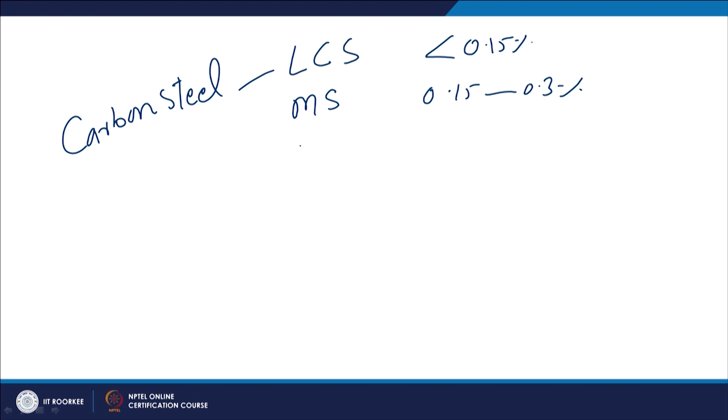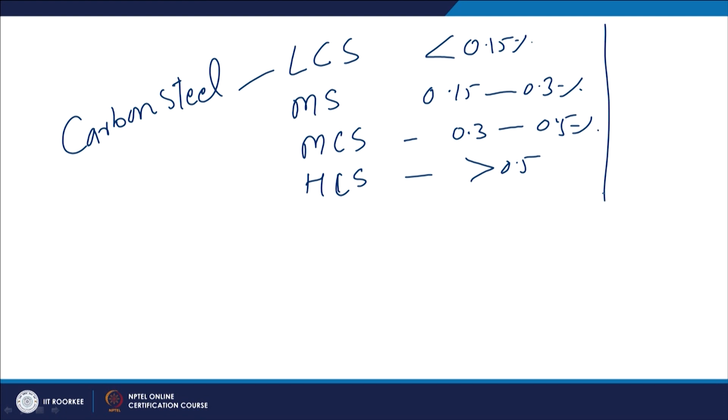We are talking about the weldability of steels, and there are four broad categories: low carbon steel, where carbon content is less than 0.15%; mild steel, where carbon content is about 0.15 to 0.3%; medium carbon steel, in the range of 0.3 to 0.5%; and high carbon steel, greater than 0.5%. According to the carbon content, as it increases, the weldability of the steel in general decreases, but still we have to weld the different types of steel. So which kind of weldability issues are offered by the various types of steels is what we will be talking about under the weldability of carbon steel.

In this presentation I will be talking about the weldability of low carbon steel first, and then I will talk about the weldability of mild steel. As I have said, low carbon steels have carbon content normally less than 0.15% and the manganese content is about 1%.

Since both carbon and manganese concentrations are low, the carbon equivalent associated with such steels is also very low. Due to the low carbon equivalent, this type of steel offers low hardenability, and the reduced hardenability associated with this leads to very good weldability.

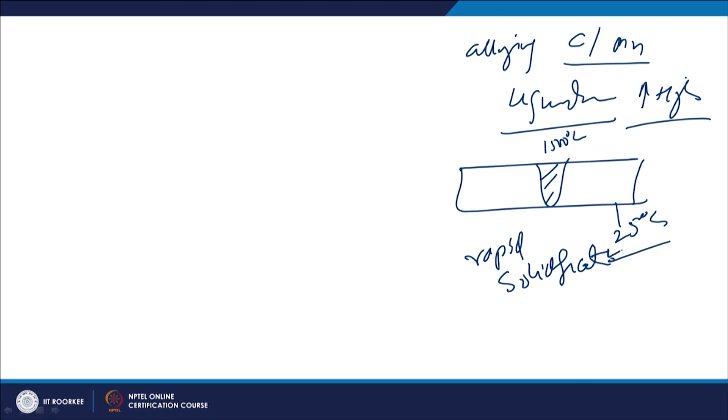Another issue related with rapid solidification is the development of pores or porosity in the weld metal, but not in all types of low carbon steel is this problem observed.

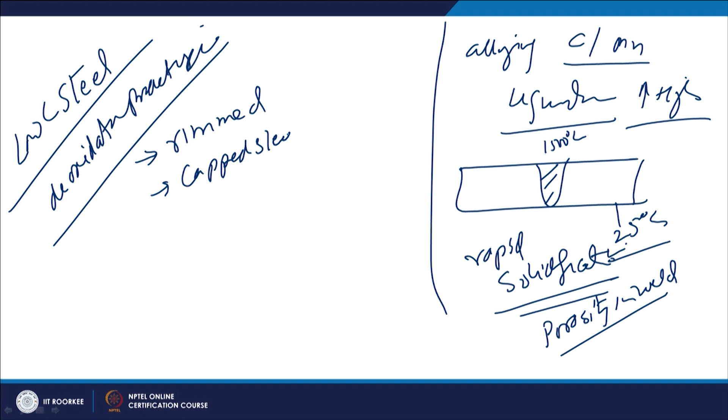Low carbon steels, based on the deoxidation practice used at the manufacturing stage, are grouped as rimmed steel, capped steel, semi-killed steel, and killed steel. This deoxidation is carried out at the manufacturing stage using suitable deoxidizers like aluminum, silicon, manganese. When this is not done at all, the low carbon steel will have high oxygen concentration in the steel itself, while in case of semi-killed or killed steels, the oxygen concentration is reduced through deoxidation using aluminum, silicon, or manganese kind of elements.

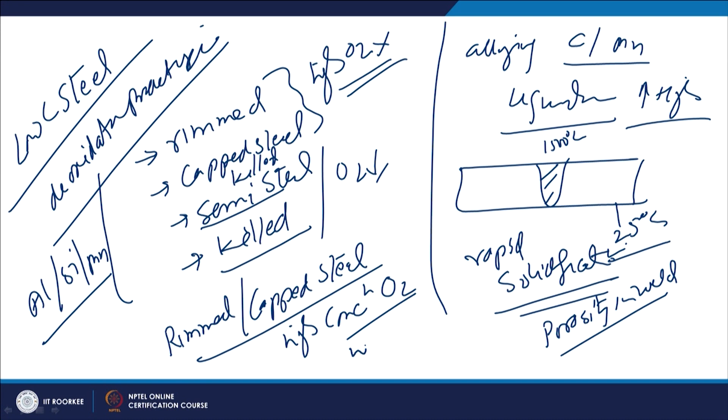So when rimmed or capped steel, which has a high concentration of oxygen, is subjected to fusion welding, then we come across the problem of porosity.

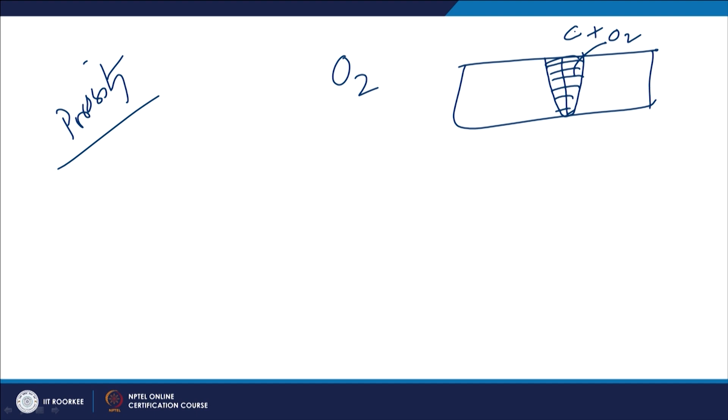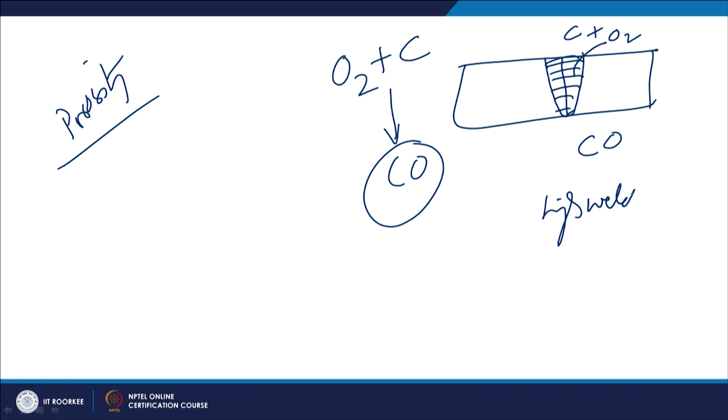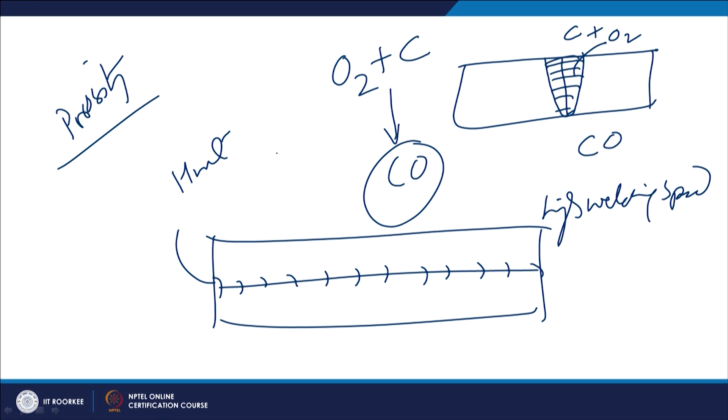So, the net heat input is reduced, and a reduction in H-net, that is net heat input, due to increase of welding speed - the cooling rate is increased because heat input, or cooling rate, is found inversely proportional to the H-net. So, if the heat input is reduced, then this in turn increases the cooling rate. So, there are two aspects: the faster extraction of heat from the weld metal coupled with the higher cooling rate due to the higher welding speed.

If these two combinations are present during the welding of low carbon steels which are rimmed or capped type, then carbon monoxide, due to the high cooling rate conditions - the weld metal experiencing the higher solidification rate, reduced solidification time - this situation leads to the entrapment of the carbon monoxide gas in the weld metal itself, because it does not get enough time for escaping, and this leads to the entrapment of the CO in the weld metal itself. That is how it leads to the development of pores.

So, the high cooling rate being caused by the high welding speed during the welding, coupled with the rimmed or capped steel having the higher concentration, leads to the formation of CO, and eventually due to the high cooling rate, entrapment of the CO leads to the development of the pores.

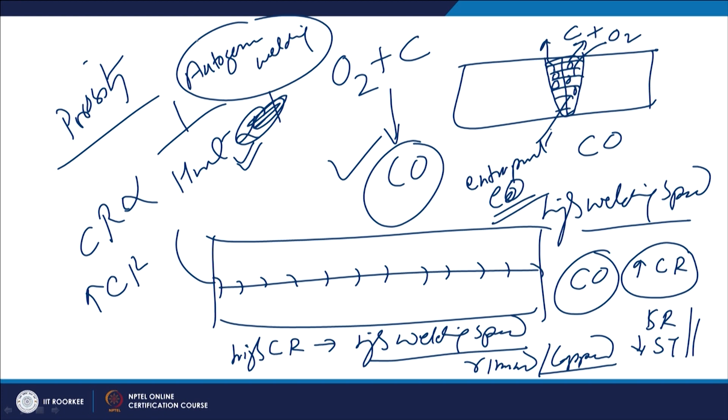So, in general, this is the commonly encountered problem in case of the autogenous welding of low carbon steels, or the rimmed or capped type of low carbon steels, because in autogenous welding we simply supply the heat from the external source for facilitating the fusion of the faying surfaces, so that whatever oxygen is present in the base metal or in the molten metal reacts with the carbon to form carbon monoxide.

So the deoxidation, the type of deoxidation practice used in manufacturing of the low carbon steel, affects the soundness of the weld metal through the development of pores, especially in case of autogenous welding, and this type of welding is performed using non-consumable welding processes like gas tungsten arc welding, plasma arc welding or laser welding - where the electrode is not consumed during the process as an inherent part of the process, but if it is required to feed the filler metal, then it will be fed from outside in the form of a filler rod.

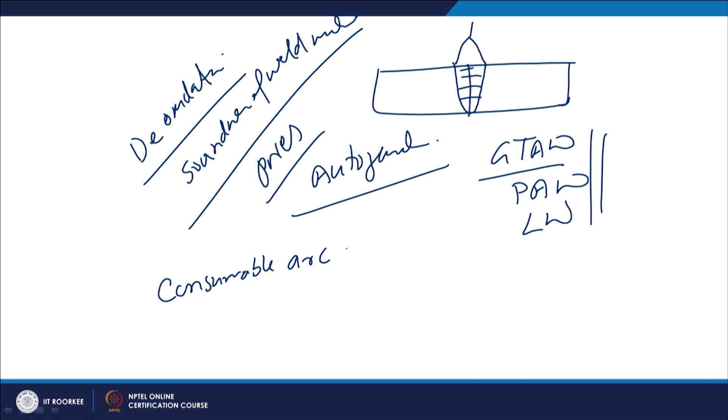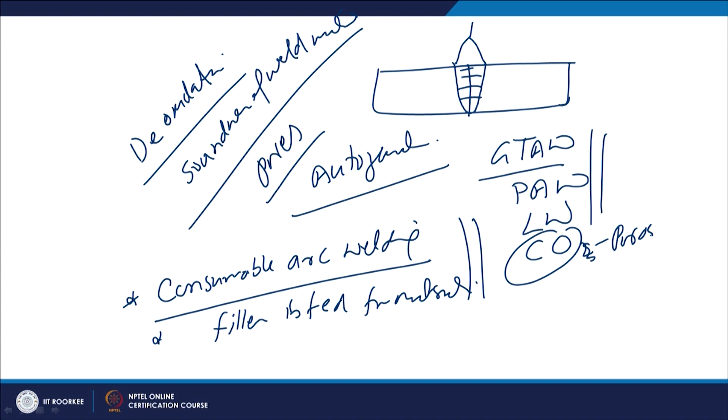So, when we use consumable welding processes - consumable arc welding processes - or filler is fed from outside, then in both these cases the problem associated with the formation of CO and the porosity can, to some extent, be addressed.

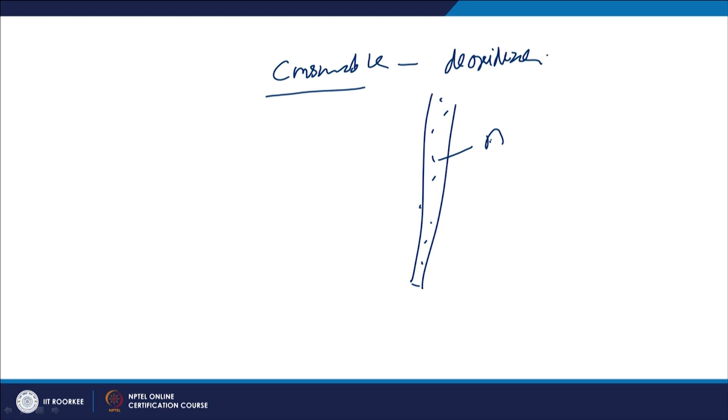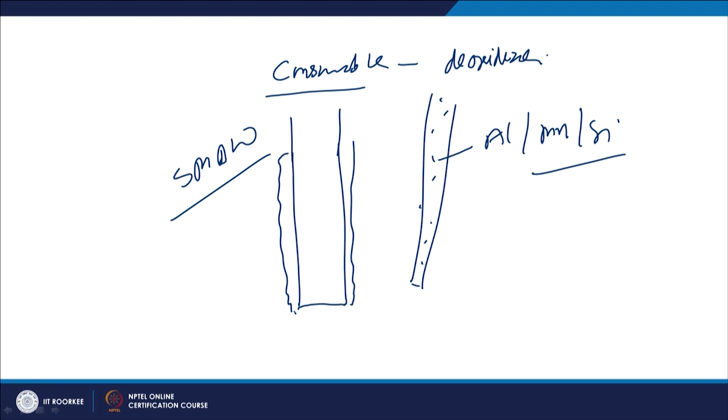And what is that logic? When consumables are used, the consumables will be designed or provided with suitable deoxidizers - the electrode itself will be designed to have suitable deoxidizing elements like aluminum, manganese and silicon, or in case of the shielded metal arc welding electrode, the alloying elements can be provided along with the flux, so that these elements get introduced into the weld metal to take care of the oxygen present in the weld metal, in order to avoid the formation of CO and the development of pores.

So, one most commonly used electrode in gas tungsten arc welding and plasma arc welding, which is very rich in deoxidizers, is E70S-2. So this is one typical electrode which can be used in case of non-consumable arc welding processes while welding rimmed or capped type low carbon steels.

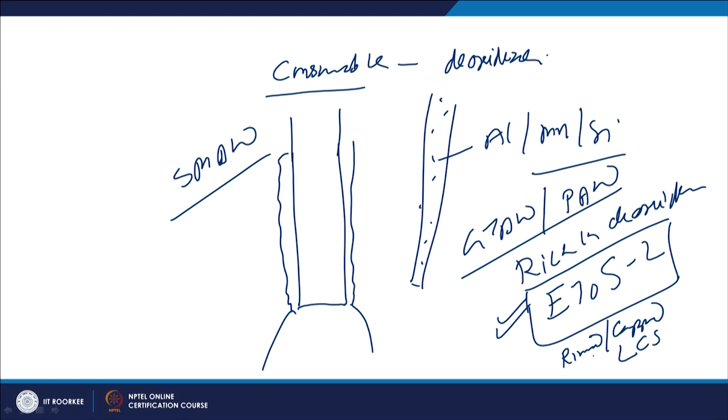So, the high concentration of deoxidizers with such kind of filler will take care of the dissolved oxygen present in the weld metal to avoid the formation of pores.

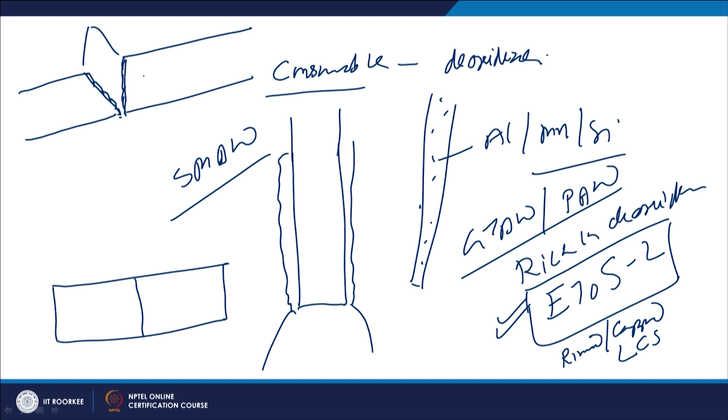There is another method where the faying surfaces are painted with the deoxidizers - like this is one base metal and this is another base metal, and two plates are to be welded. So, paint of the deoxidizer like aluminum is applied on the faying surface, and thereafter welding is performed. This aluminum will act as a deoxidizer to take care of the oxygen, so that the issues related to porosity can be addressed.

So, the porosity was the main problem associated with rimmed or capped steels. But if we talk of the killed steels, or killed low carbon steel, then the problem is of another kind - that is, about the formation of the viscous slag due to the oxide formation during welding.

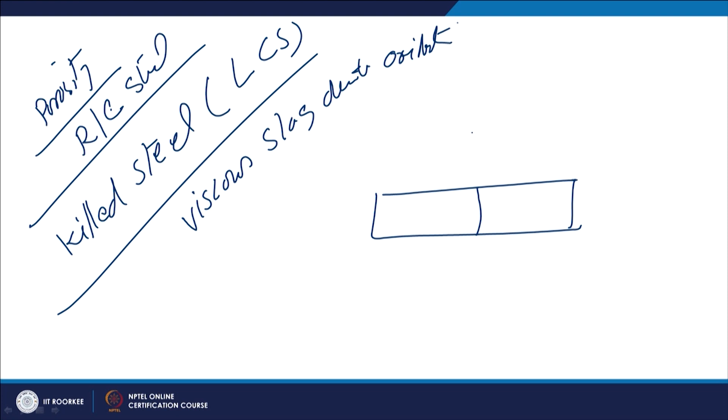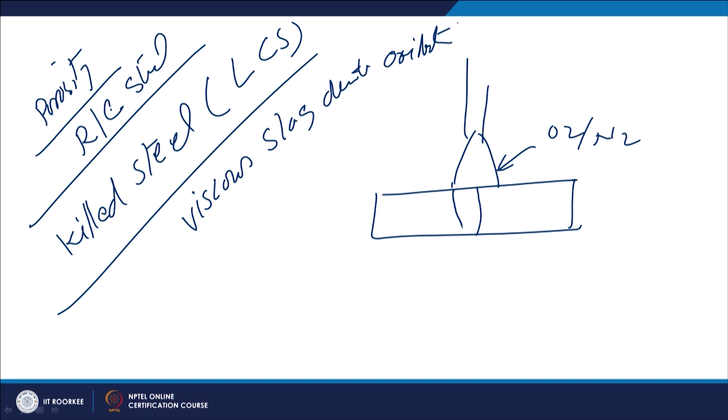So, the killed steels during welding, if the protection during welding is poor, oxygen from the atmosphere or nitrogen from the atmosphere reacts with the molten metal, forming the viscous slag.

This viscous slag or the impurities or oxides which are being formed at the top surface of the molten metal will interfere with the flow of the molten metal during welding. So the flow pattern is adversely affected, which can lead to the development of weld defects associated with poor fluidity or poor flow pattern of the molten metal. So there are means to avoid the formation of the viscous slag or the oxides of high viscosity which adversely affect the flowability of the molten metal.

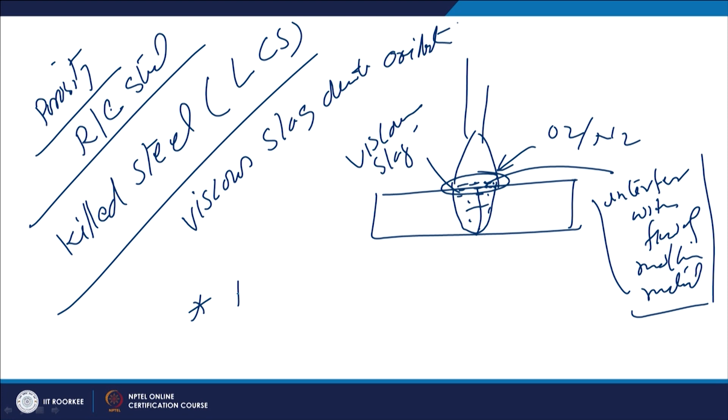There are two things which are tried. One is to have very effective shielding of the molten metal. If the shielding is not effective, then these oxides will be formed due to interaction with the atmospheric gases of the molten metal, leading to the formation of the viscous slag, the molten layer of higher viscosity due to the formation of these oxides.

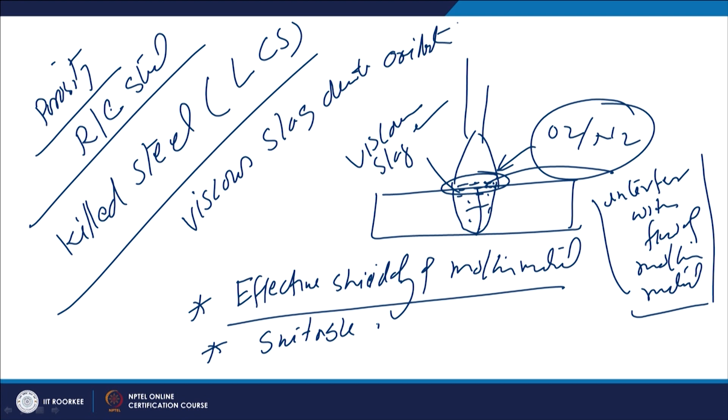Another thing is addition of suitable deoxidizers in the weld metal. These deoxidizers will be reducing the amount of viscous oxides being formed, and the characteristics of the slag formed will be more favorable compared to the viscous slag. So addition of suitable deoxidizers as well as effective protection helps to avoid the formation of viscous slag at the top layer of the molten metal, which otherwise adversely affects the flowability and increases the tendency for defect formation.

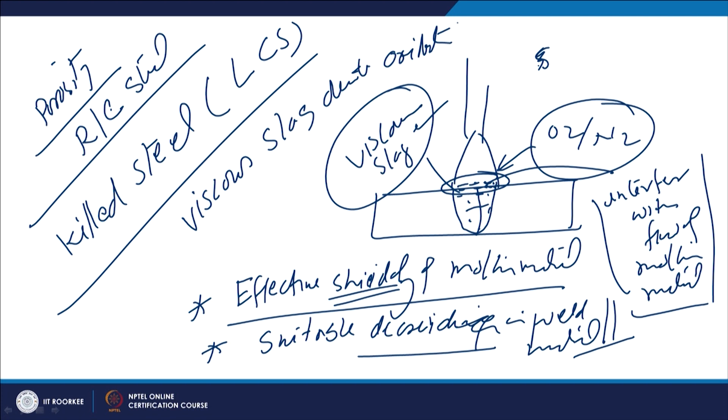Now we will talk about the weldability of mild steel. As I have said, mild steel has much higher carbon content in the range of 0.15 to 0.3%, and also the manganese content can be higher, like 1.4%. So a combination like 0.2% carbon, 1.4% manganese can lead to very high carbon equivalent, increased hardenability, and so increased hardness and yield strength.

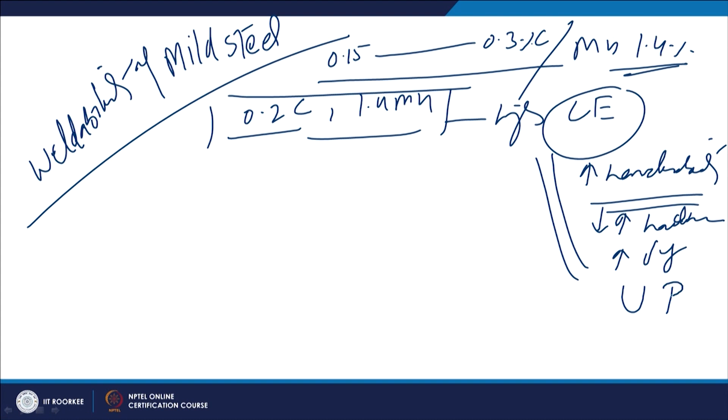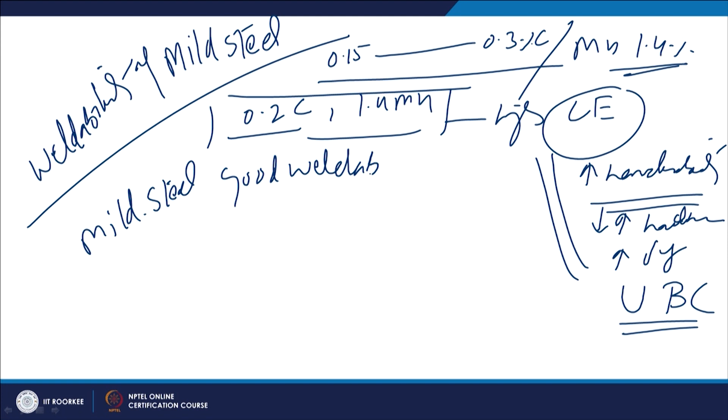And if there are a lot of inclusions and the conditions are more favorable with regard to the restraint, then it can cause the under bead cracking tendency, so it can be susceptible under certain conditions. Otherwise, mild steels offer good weldability. So we will talk in detail about the various weldability related aspects of mild steel.

Normally, up to 0.2% carbon and 1% manganese, 25 mm thickness, no restraint during welding - if these are the conditions like carbon content, manganese content, 25 mm thick plate and no restraint during welding of mild steel, then primarily no preheat is needed.

No post weld heat treatment is needed and no special welding procedure is needed, because whatever weld is developed, the properties of the weld metal as well as heat affected zone are still favorable with regard to yield strength, toughness, and hardness. So the issues related with mild steel are not much when it has carbon content of 0.2%, 1% manganese, up to 25 mm thickness, and welding performed without any restraint condition.

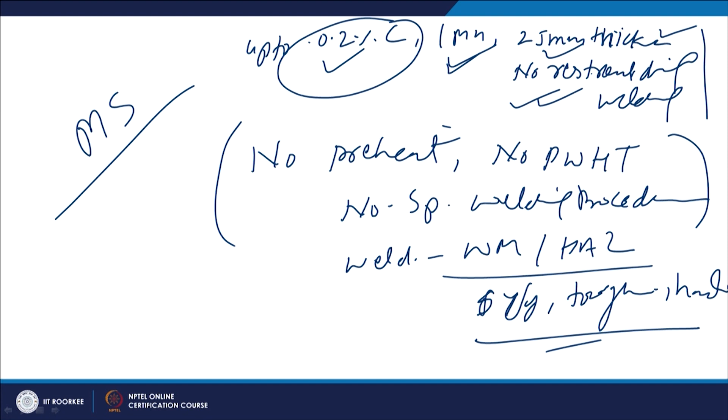But the problems will arise on the other extreme, like mild steel having carbon content of 0.3% and manganese of 1.4%, with welding to be done on thickness greater than 25 mm. If these are the conditions, plus one more - welding performed under very restrained conditions.

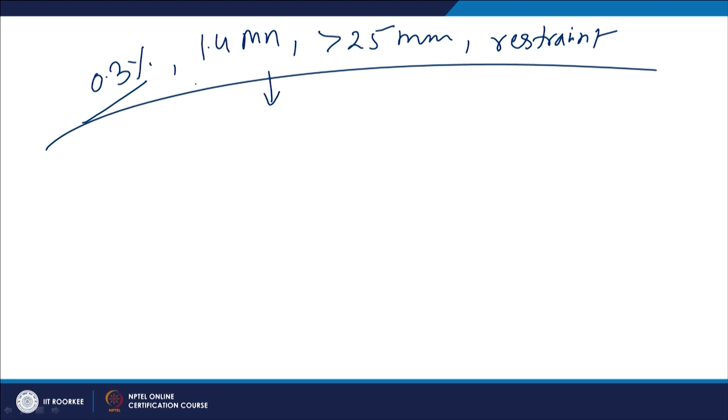So if these conditions for welding are present, then as per the composition and fabrication conditions, there can be various problems, because high carbon as well as high manganese leads to higher carbon equivalent, higher hardenability, and so the formation of martensite of high hardness, which in turn increases the underbead cracking tendency of this kind of steel, while offering really good yield strength.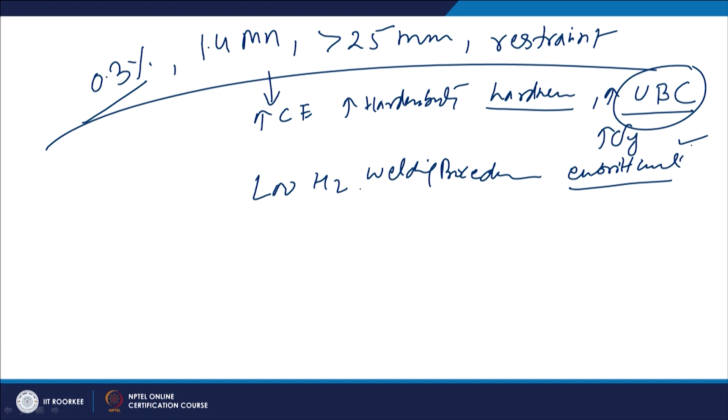So in order to avoid the underbead cracking and the possibility of embrittlement, it is sometimes required to use the low hydrogen welding procedure, which means using consumables that lead to minimum hydrogen content in the weld metal, very effective cleaning, preheating, post heating as per requirements, so that the hydrogen can really be taken care of.

Suitable preheat - the preheat temperature may not be very high, it may be like 40-50 degrees centigrade only - and then post weld heat treatment, so that if there is hydrogen, it can be diffused out to avoid any possibility of cracking subsequently. Similarly with post weld heat treatment, if preheat is being applied, it is always ensured that after one pass, other passes are also carried out at the same temperature. So preheat temperature and inter pass temperature both need to be maintained at the same level.

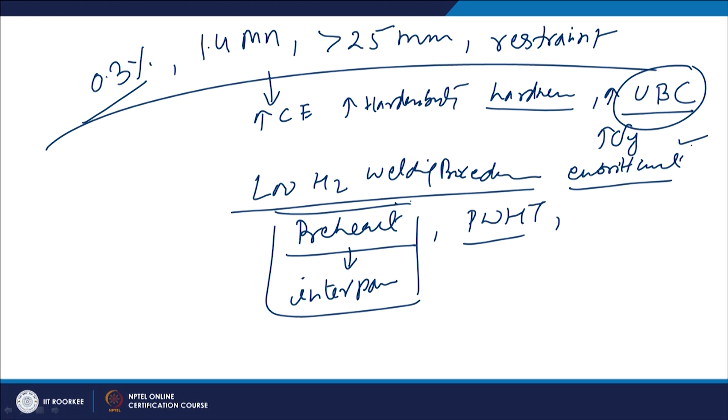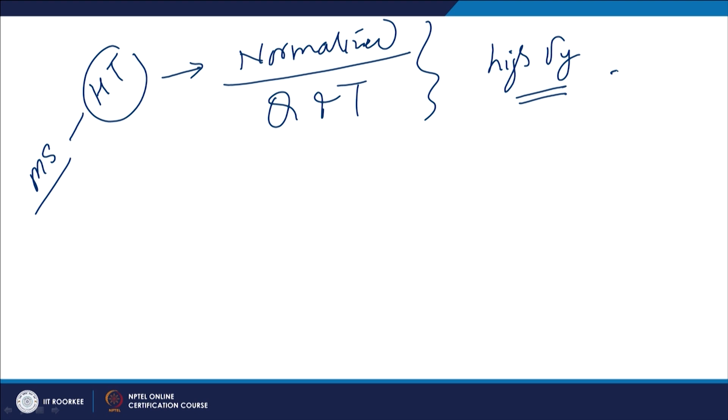Now, these mild steels are found in various heat treatment conditions. Normal treatment conditions in which mild steel is found are the normalizing or normalized condition, and quenched and tempered condition. This heat treatment is primarily given so that, as per the carbon content, high yield strength sigma y can be ensured, in a range of yield strength from 350 to 500 MPa. So it may be required to perform welding in various heat treatment conditions like normalized or Q&T conditions.

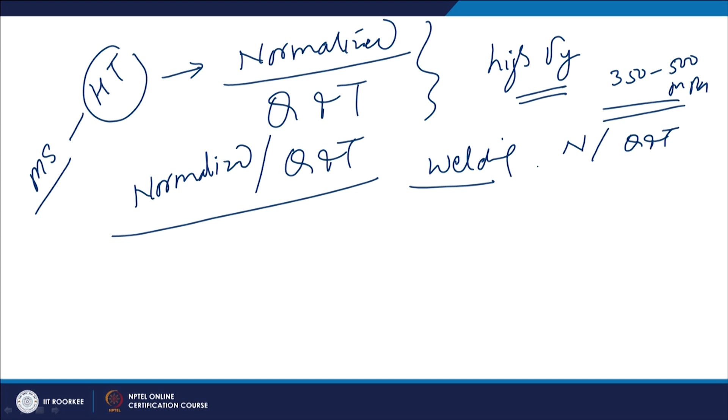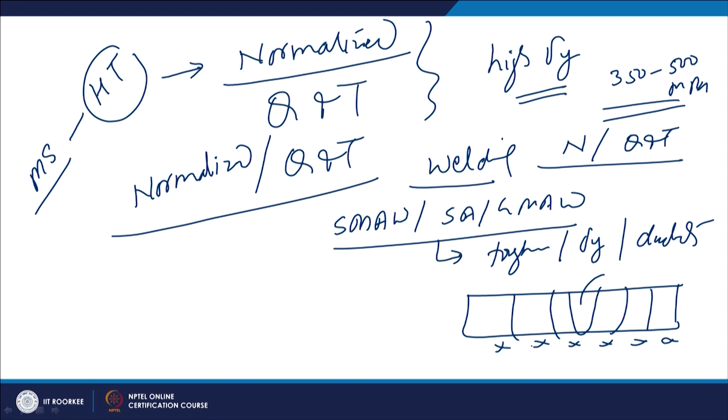So, if we talk of the welding procedure to be used when the steel is either in normalized or Q&T condition, normally all standard welding procedures like SMAW, SAW or GMAW can be performed without any special precaution, because it offers a reasonably good toughness, yield strength and ductility combination, and the properties mostly in the weld, heat affected zone and base metal are almost similar. Special precautions are needed only when we want these to be almost the same across the weld joint.

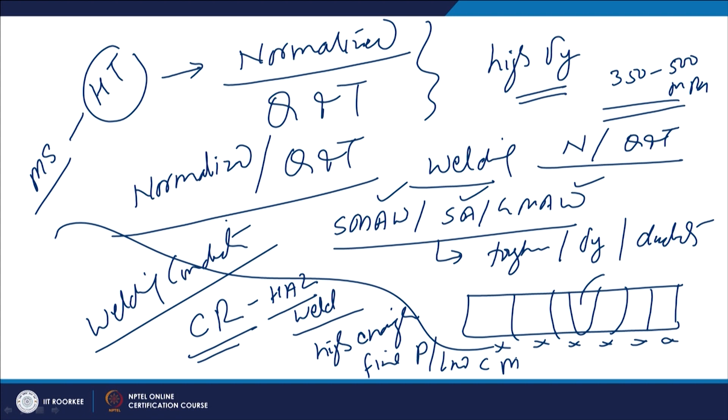It is normally easier to perform welding using standard procedures if an acceptable weld is needed in normalized and quenched and tempered steels, because the cooling rate conditions experienced in the heat affected zone and weld region are high enough when using SMAW, SAW or GMAW to produce a fine perlitic structure or low carbon martensite. This will not deteriorate properties appreciably and will lead to a good combination of hardness, toughness and strength. So most common welding processes can be easily applied, but if you want exactly the same toughness in the weld, base metal and heat affected zone, then special precautions are needed for developing a suitable welding procedure.

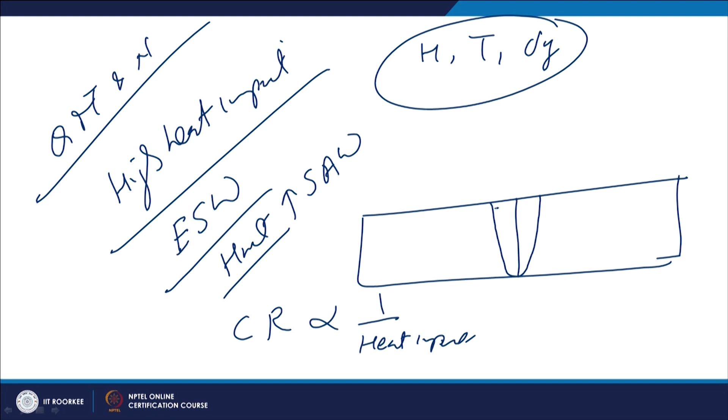In some cases, when the steel is welded either in Q&T or normalized conditions using a high heat input welding process like electroslag welding, or extremely high welding conditions where the current, voltage and welding speed combination gives a very high heat input, as in SAW, high heat input conditions result because cooling rate is inversely proportional to heat input. So if the heat input is very high during welding of mild steel in Q&T or normalized condition, the cooling rates will be very low, either in the weld metal zone or in the heat affected zone.

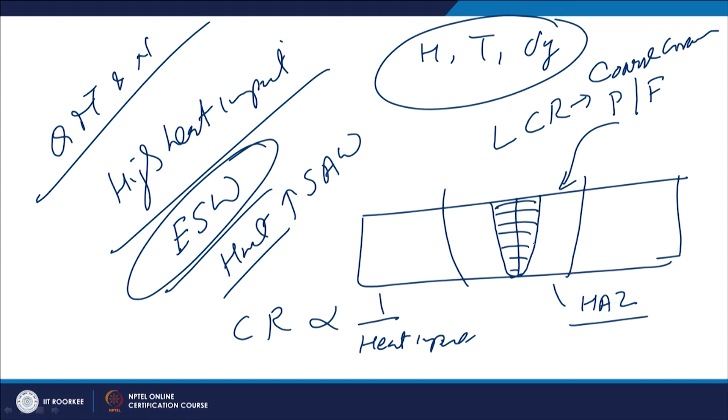Low cooling rate in the weld metal or heat affected zone, especially during welding by the electroslag welding process, will cause a very coarse grain perlitic or ferritic structure. This coarse structure in the weld metal and heat affected zone, more specifically in the heat affected zone, lowers the toughness of the weld joint, increases notch sensitivity, and reduces strength. So in order to restore the mechanical properties in the weld and heat affected zone, post weld heat treatment may be necessary.

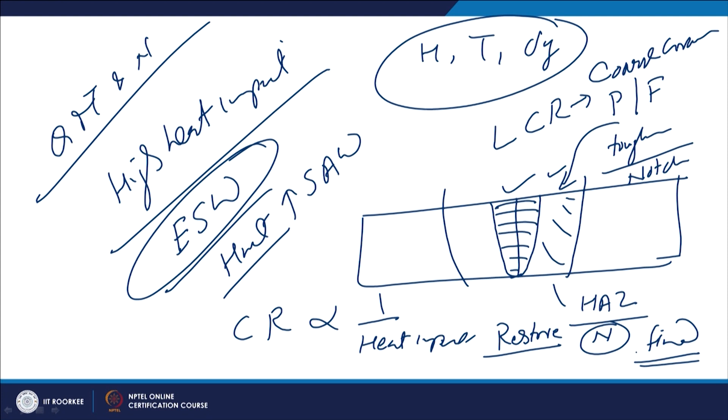So we may perform normalizing after the welding, so that the grain structure can be refined. A fine grain structure in the weld as well as the heat affected zone can be produced, so that the toughness and strength can be enhanced. And if post weld heat treatment is not possible due to fabrication conditions, then it is ensured that after welding, the weld metal and heat affected zone are cooled at a sufficiently high rate, so that the fine grain structure can be realized.

So now I will summarize this presentation. In this presentation, basically I have talked about the weldability issues related with low carbon steel and mild steel. In case of low carbon steels, there are two main issues: one is porosity formation, and another is viscous slag formation. While in case of mild steel, in general the weld is good, but if the welding is performed under restraint conditions, with high carbon content and high manganese concentration, then we may require suitable preheat as well as post weld heat treatment.

Further details about the weldability of mild steel I will be talking about in the subsequent presentations. Thank you for your attention.